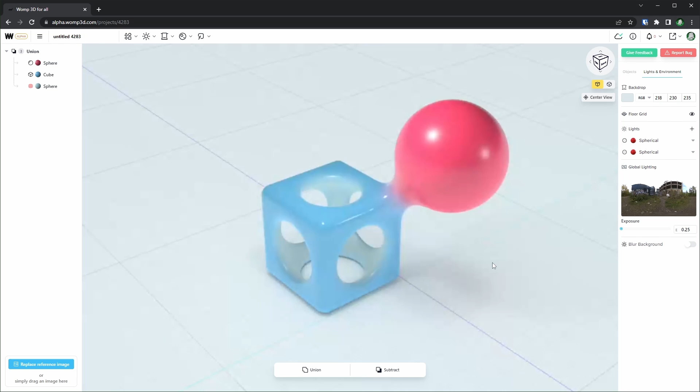First thing we should talk about is how to move around. You can left click and drag, and this is going to orbit the camera. You can also right click and drag, and this is going to pan back and forth. And you can use the scroll wheel to zoom in and out.

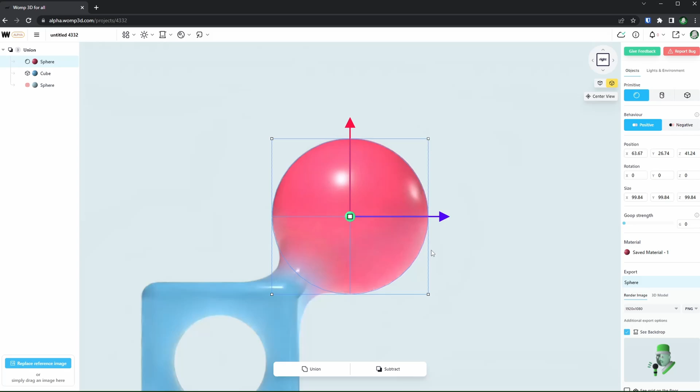We also have these options up here if you want to just snap to the front, things like that. And if you drift off to the side, you can select an object and hit center view, and that will put it in the center of the screen. We also have an option to switch between perspective and orthographic. So if you're in orthographic, you can look from the front without perspective, and it just looks straight on.

Now, as you saw, we can select objects. We can do that by just left clicking on them. And if you want to move them around, we have these options on the right over here: position, rotation, and size. You can just type in values that you want if you know what you want, or you can scroll through them. To do that, you just hover over the letter, click and drag. And if you want to undo, you can just hit Control-Z.

You can also move things around by selecting them, and then we have these arrows right here. You can click and drag on those to move them back and forth. Also, if you hover in the middle, we have these other options. That's basically moving things along 2 axes instead of 1.

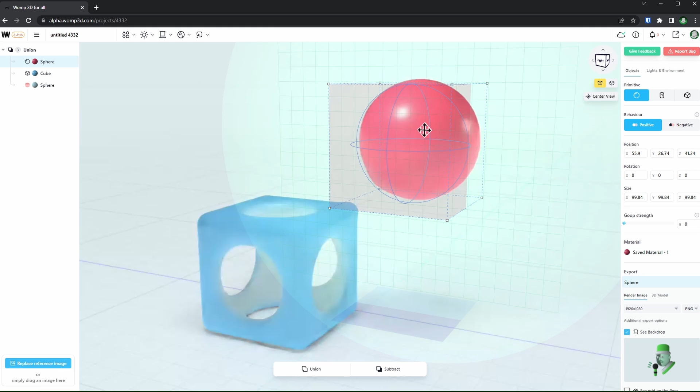If you want to rotate things, you just go to any corner and you can see we have arrows right here. So if you click and drag on those and you're outside of the circle, it will just display the amount of degrees. If you're on the inside of the circle, it will snap to these increments, which is pretty handy. Now let's select the cube for this part.

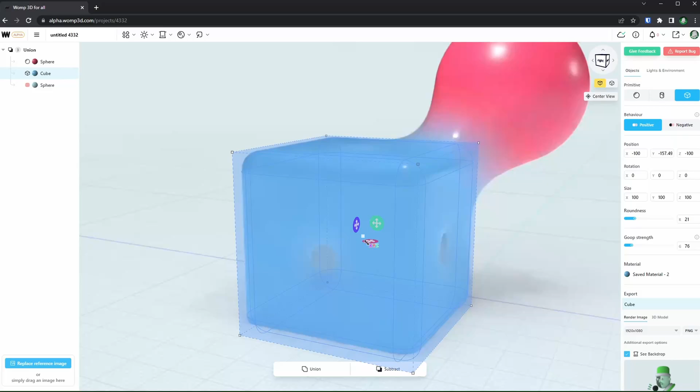You can scale things up and down by hovering over the white square in the middle and clicking and dragging, and that will scale the whole thing up and down. You can also hover over any of the edges, and you can see we have these icons right here. When you hover over those, it will let you select a face, and then if you click and drag, it will extend that face. So this is more useful for things like cubes and cylinders. If you do that with a sphere, it will scale uniformly.

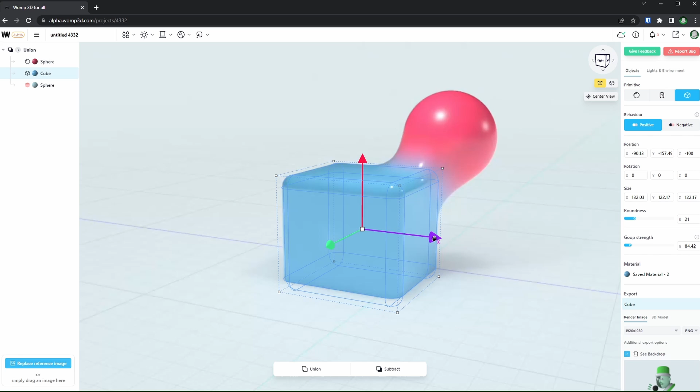Now, I'm sure you've noticed something weird going on with the cube right here, how there's an object cutting into it. That's because we actually have a third shape in here, and we can select it over on the left by just clicking on this one. Now that we have this selected, you can see more clearly that this is cutting into our cube. That's because this is a negative shape. So on the right over here, under behavior, we have 2 options, positive and negative. Negative is going to cut into other shapes as long as they are above it over here in the outliner. And we can turn this to positive, and now we can actually see that other sphere.

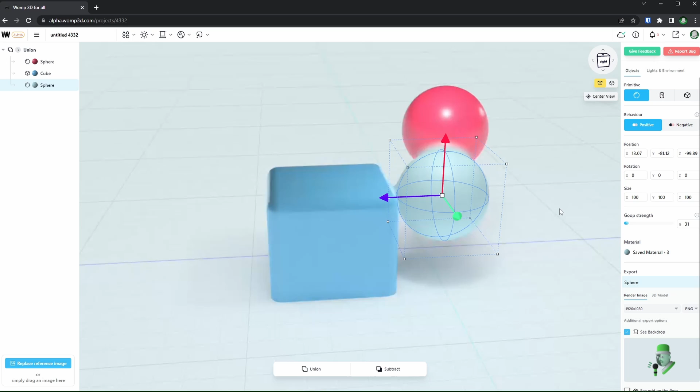If we drag it over here for a second, this is a good opportunity to explain Goop strength. So over on the right, we have Goop strength right here. And when we turn it up, you can see that these objects start kind of fusing together. Goop strength, when you turn it up, they'll be able to connect from further apart. So now it's not connected, but if I turn Goop strength up, it will eventually connect. And a nice thing about the way these connect too is it's going to blend the materials, which just looks pretty nice.

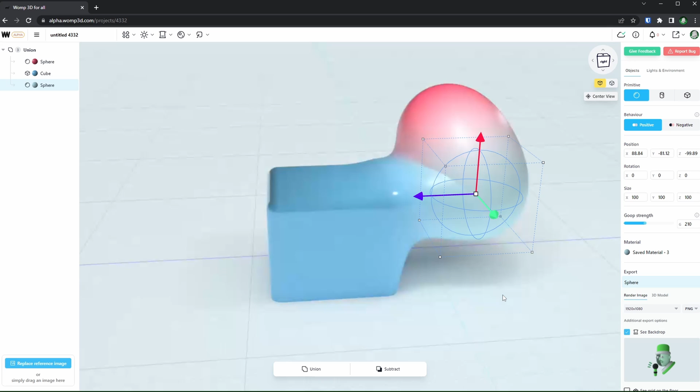Now let's check out the interface. So on the left over here, we have the list of our objects, and you can see when we hover over, we have some different options. Also, when you hover over it, if you look over here, you can see that it's outlining the object that you're hovering over, which is nice if you're trying to find objects. You can also click on them to select them. And then we have this button on the side. When you click that, we have these options in here for copy, paste, duplicate, things like that. You can also click and drag to move them around if you want to reorder them.

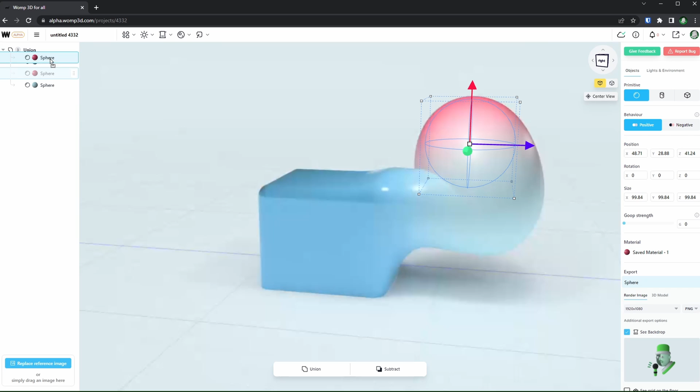Now up at the top, we have our scene name, so you can click on that to change it. I'm just going to change this to say Goobot for now, because that's what we're going to be making later.

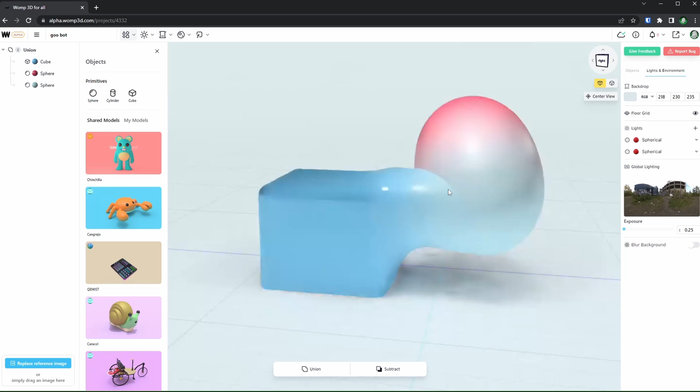Next to that, we have objects. This is where you can bring in new objects. All you have to do is click on them and it will put a new one in the center of the scene. You can delete them by having them selected and hitting backspace. Also, if you have an object selected in your scene and you go over here, you'll see these extra little icons, and if you click on that, it will swap it out with the object you select.

Down here, we also have a way to add in community projects, which is a pretty neat thing to see.

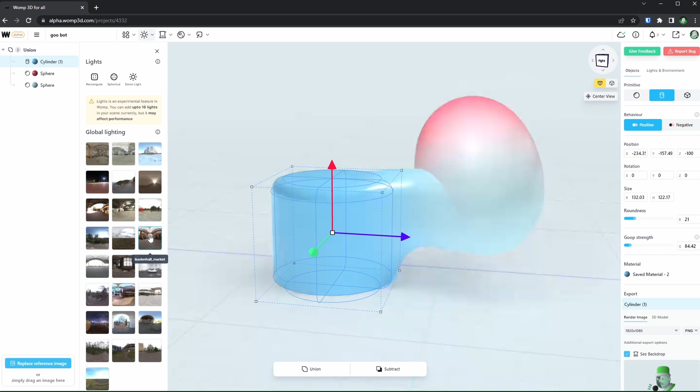Next, we have global scene lighting, so you can add in different lamps and things like that to light your scene, and below we have different images for global lighting. If you change this, it's going to change the overall lighting and also change the way the reflections look. Next, we have backdrop. This is just going to change the background color, and it will also change some of the reflected color in here.

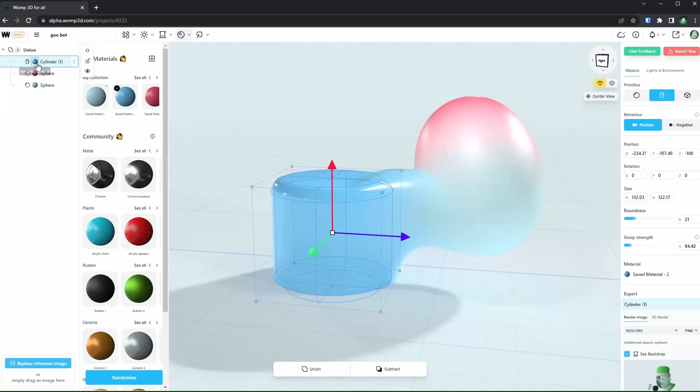Next, we have materials. This is where you can see all of the materials you've made, and again we have materials from the community if you want to use somebody else's. Another way of changing the materials is over in the outliner — you can just click on these little colored balls, and that's another way to open up this panel.

Last, we have functions where you can duplicate, union, and subtract. We'll talk more about union and subtract later.

Now that we've explained all that, let's come over here and delete this and get started with our robot. So to get started with the body, I want to add in a cylinder. We can click this button up here, add in a cylinder like that.

I'm going to change the backdrop so it's a little higher contrast. A way to change the backdrop is when you have nothing selected, you have lights and environment over here, and we can change to whatever color we want. I'm going to change this to a purple color and give it a little color like that.

I'm just going to drag this up and expand the radius a little, and this will be for the body of our robot. Now we can also copy and paste to duplicate objects.

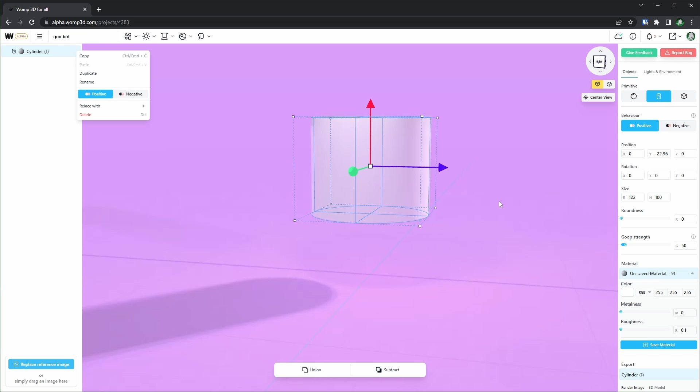If you come over here and click on this button right there, you can see we have copy, paste, duplicate, rename — we have some options here. We can actually just use Control C and Control V, and that will duplicate this.

Now I'm going to rotate this around, so let's rotate like this, and I'll keep it on the inside so we can snap it to 90 degrees like that. Now I'm going to turn the radius down like this and turn the height up, so this is going to be for our arms basically.

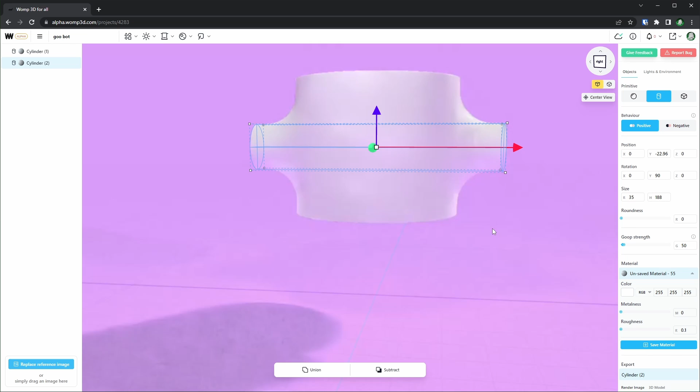And we can mess with the roundness and the goop strength. The roundness is going to affect the edges — you can see as I'm rounding it, they're kind of smoothing off. If you turn this up all the way, it will become kind of capsule shaped like that.

So I want to keep this pretty low, I'll just set it to something like 5. I like to have a slight rounded edge just so it catches the light a little better. I'll do that for this one also.

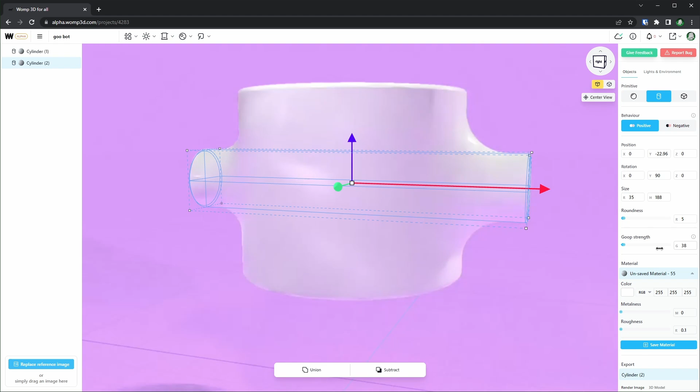And for goop strength, that is going to control how much it's curving right here. So we can just click and drag right here to make it slide. If we turn this down all the way, it will be completely sharp where they intersect right there. So I don't usually like to have it set at 0, especially for this shape — I kind of like when it's a little more smooth like that.

So let's change some of these colors a little. I'll just click on this. One way to start changing colors is down here on the right — we have material options right here. You can see it says unsaved material. So let's just change the color of this.

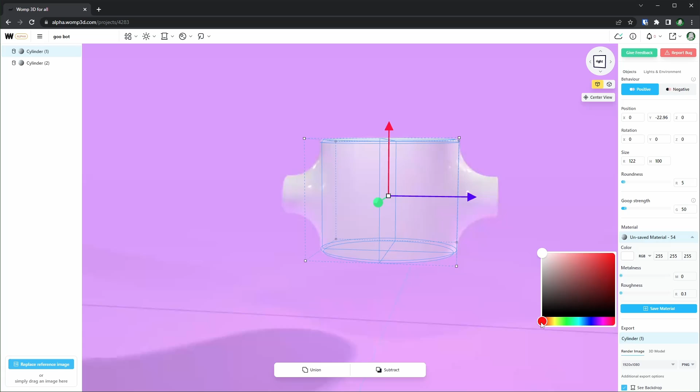I'm gonna make our robot mostly orange with maybe some purple details. So let's make this orange right here. This one's gonna be a lighter orange color. I think that is pretty good.

Now we can save this material with this save material button, and I'll just name it orange, something like that, and hit save. So now we can reuse this on our other objects. I'll click this object, go up to the material option, and we have recently used at the top, which we can use to have our list of materials.

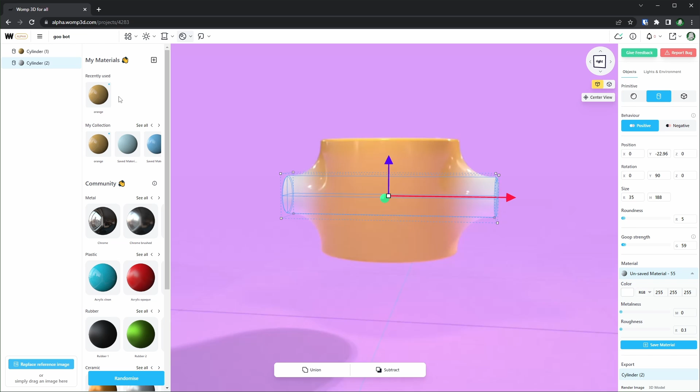I'll use this, but I actually want this to be a different color, so I'll hit duplicate and apply. Now we have a copy, and I'll just call this dark orange. Let's drag this down and we'll have something a little darker.

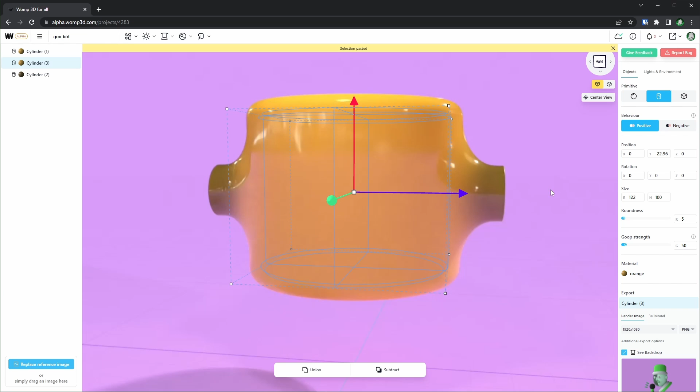Let's duplicate this right here, select it, Control C, Control V, like that. I'll change the radius down a little. We're just gonna create an extra little shape at the top and the bottom. I think maybe we should turn the goop strength down, so I'll turn it down to something like 5, so it's a little sharper.

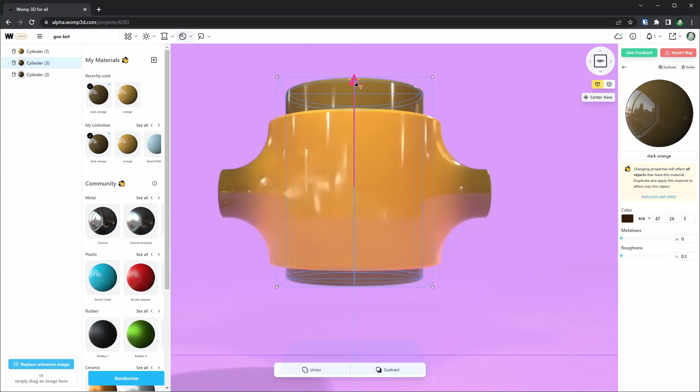I also want to change the material to be dark like that, so I'll pull it up a little. I want to kind of hollow this out so we can add a negative object, but I want it to be pretty close to the same size and shape.

So I'll copy paste this, Control C, Control V, and with that selected, turn the radius down, and make this a negative shape. If this doesn't work, it's because negative shapes have to be below other objects, so you just click and drag it down. You want to make sure the things they're cutting into are above them. That's the way they work.

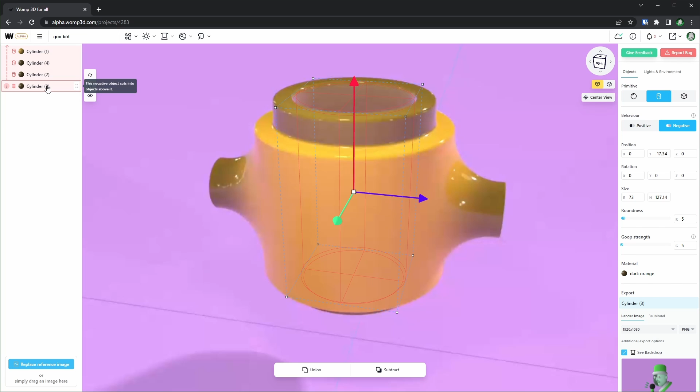It'll actually tell you that if you hover over it, it says negative, this negative object cuts into objects above it. And we can drag the bottom up a little too, so it's not going in too deep.

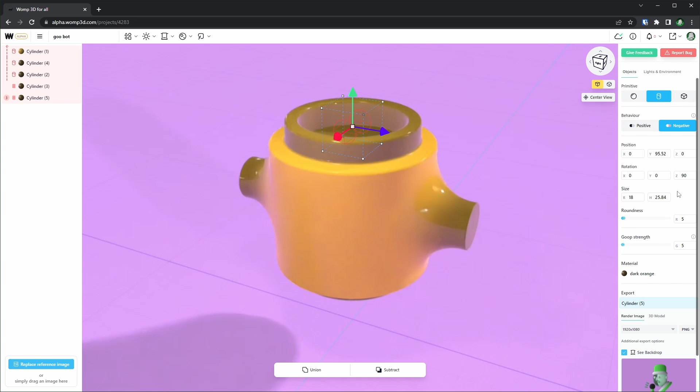Let's do some more fun stuff with negative shapes. I'll select this one we just used and duplicate it, Control C, Control V, and rotate this 90 degrees by typing it in. Now it's on its side. I'll turn the radius down and the height up so it's cutting through. I think this is a little too low, so I'll pull it up.

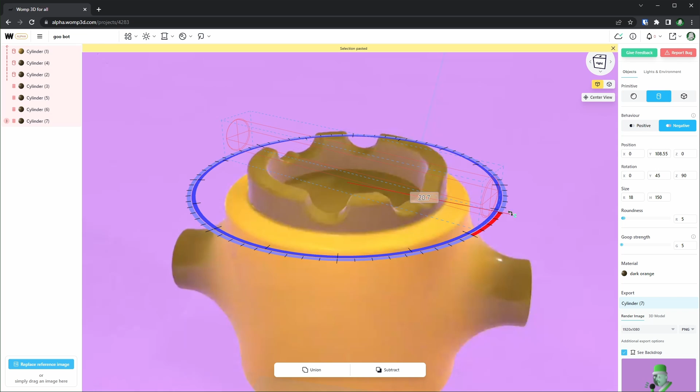I want there to be these cuts going all the way around, so I'm gonna duplicate this a few times with Control C, Control V, go to the corner, rotate this 45 degrees, and keep doing this a few times until we go all the way around. There we go, now we have this cool shape right here.

I want to make the top of this look kind of goopy like a lava lamp. To do that, I'm going to select this cylinder, duplicate it with Control C, Control V, and make this positive. Now I want this to be below everything so it's not being cut into, and I'm going to make this a different material.

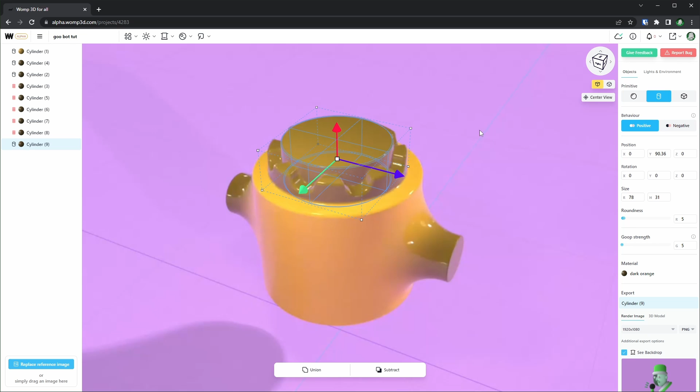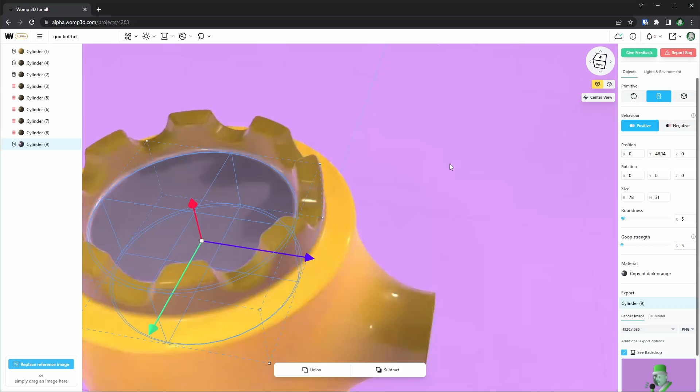Let's go down over here, duplicate and apply, and I'm going to turn the metalness up most of the way. I want this to be kind of like a pale purple, something like this maybe, and I'll drag it down a little. I don't want this to morph too much into the environment around it, and if we turn the goop strength up, you can see that's exactly what it's going to do.

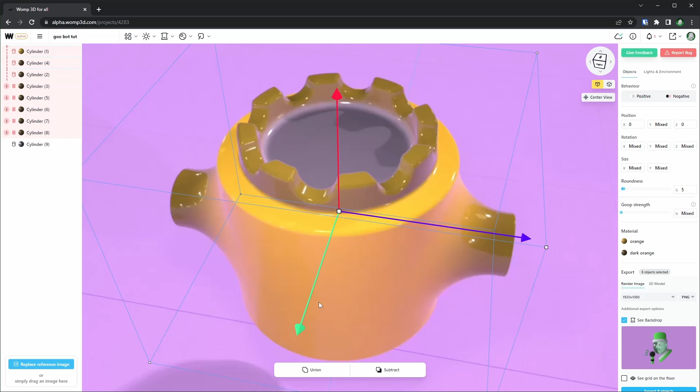So I guess now is a good time to talk more about unions. I like to use these kind of like groups. Right now we have the cylinder that we don't want connected, and then everything else, which is basically the body of our robot. Let's go to the outliner, select this bottom shape, then shift select the top one, which selects everything except our cylinder, and we can click union. As soon as we do that, you can see this disconnects over here.

It's not really connecting to it anymore, and we have everything kind of cleared up over here. It's just called Union 1, and we can look inside of it by clicking this arrow right there.

So union is a way of grouping a bunch of things together. If you know about Boolean stuff, this is going to make everything connected. But because all of this is already connected, we just have a tidy group.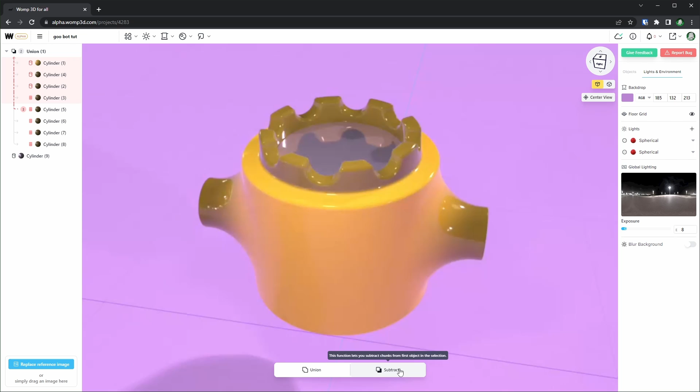So subtract is a similar thing, and they have a little description of what it does down here. It says this function lets you subtract chunks from the first object in the selection. So it would basically make this first cylinder be positive and then everything below it be negative.

Another thing we can do is hide entire unions with this eye right here. So we can click that, and now we're only looking at this cylinder.

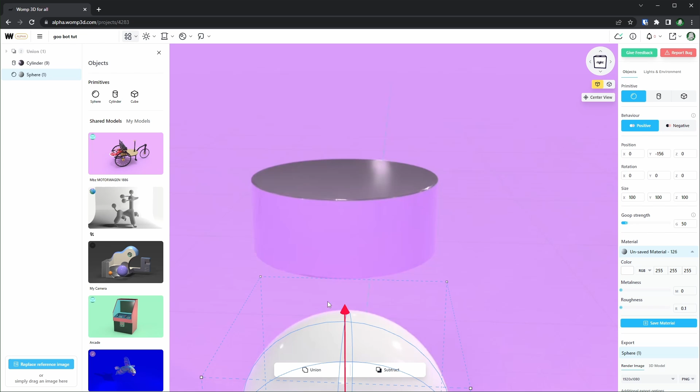So I am going to add in a sphere, and it ended up down here. Let's drag it up, and I'm going to scale it down like that. Let's move it around over here.

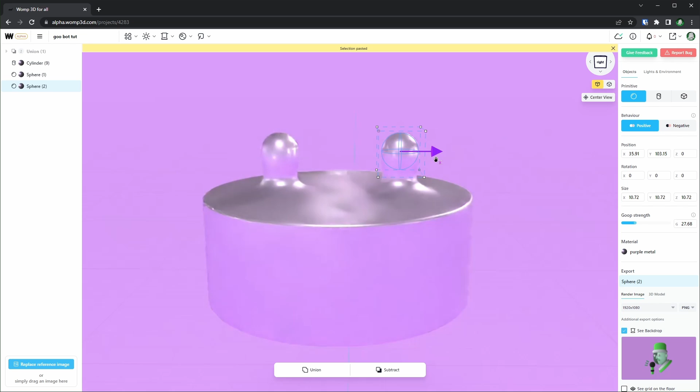And I'm going to change the material, so we can change it over here. Now we can duplicate this around a bunch of times to kind of get this looking a little more blobby, like a lava lamp. So Control C, Control V, move some of this around, change the scale and move it around and stuff. And I'll add one that's a little higher in the middle like that.

But I want this to look more connected, so you can either change the Goop strength, just turn it up until it starts connecting, but then it's going to connect to all that stuff. So what I'll do instead, just Control Z to go back.

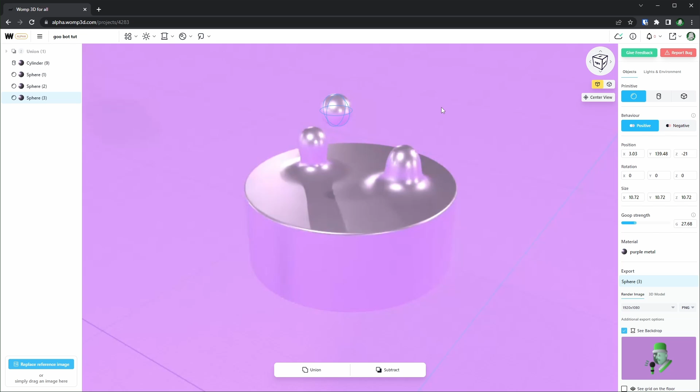So what I'll do instead is just duplicate this, Control C, Control V, and I'm going to turn this into a cylinder. So we can just hit the swap button right here. Now we have this cylinder.

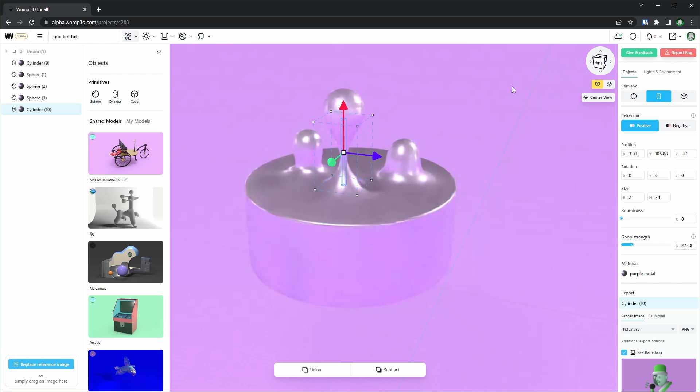I'm just going to drag this into the middle. I'm going to turn the radius down quite a bit like that so it's skinny, and then I'll turn the height up. And we can use this to connect the two objects like that. It's making this cool kind of bridging goopy thing.

And I think that looks awesome. So I'll just duplicate a few more of these around and maybe make them a little smaller. Play with the Goop strength if you want it to look a little different.

And if we want, we can change some of the colors of these too. So I'll select this one and maybe just duplicate this color, and I'll make this a little more vibrant like that. We can add that to other things, but I'd like a different color too.

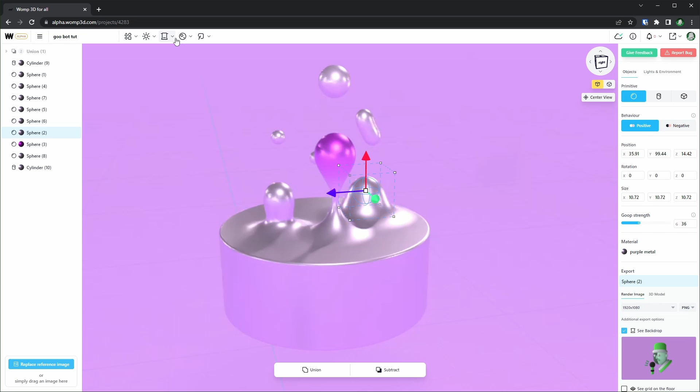So let's duplicate this again, and I'll make this more orange like that. So we have some nice contrast now. So we can just go over here, click on things and apply different materials that we have over here.

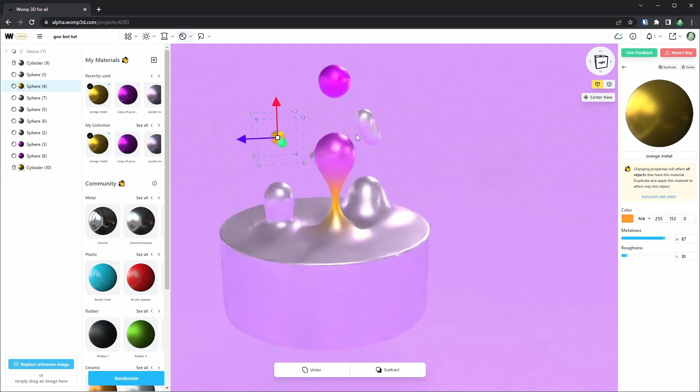So I'll make that one purple, this one we can make orange. We'll just go around and add these together. So I think that's good for now, but if you want, feel free to add more.

And now let's add all of these together too into a single union. So I'm just going to click on the first one, shift click on the last one, and then we'll add a union right here. And we can bring back this first one.

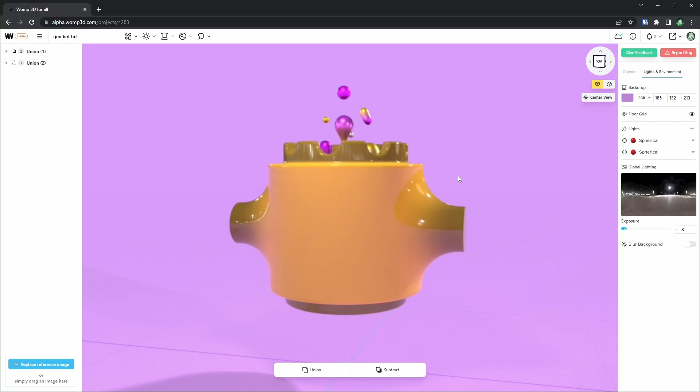All right, let's make the face now. So the face, I'm just gonna start off with a sphere. You can add in a sphere right here. I'll drag it out a little and pull it up until it's like close to the center.

And I want to add the light purple metal material. So let's go over here. We have purple metal. Let's look from the front. And I'll just select this and scale it down.

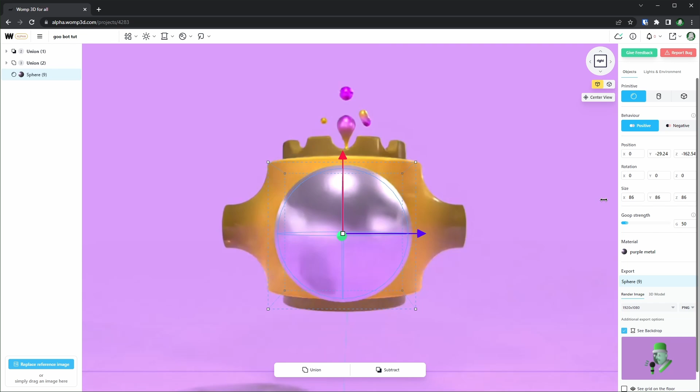Now I'm going to hit Control C, Control V, and we're just going to copy this. And this is going to be for our eye. So I want to make this a little darker.

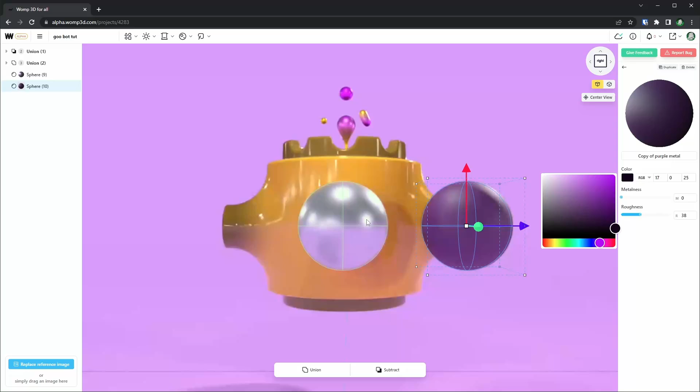We can come over here and let's just duplicate this. I'm going to turn the metalness all the way down and the roughness up a little more, so it's a little more matte, less reflective, and I want this to be quite a bit darker, just so we have something a little higher contrast. Now let's maybe turn the goop level down.

I'll set this one to 5, and I'll set this one to 5 also for now. Now let's line this up for where we want one of our eyes to be. Turn the size down. If you want this to be sharper, turn the goop strength down like that. So let's talk about mirroring now, because I want to mirror this eye.

Right now mirroring is in development, so at the time of recording there are no options for it. There's just a keyboard shortcut, Control, Shift, and M. Now you can see it's mirrored to the other side, which is going to help us out a lot. By the time this comes out, this feature might exist in the menu, but for now we just have to use this keyboard shortcut.

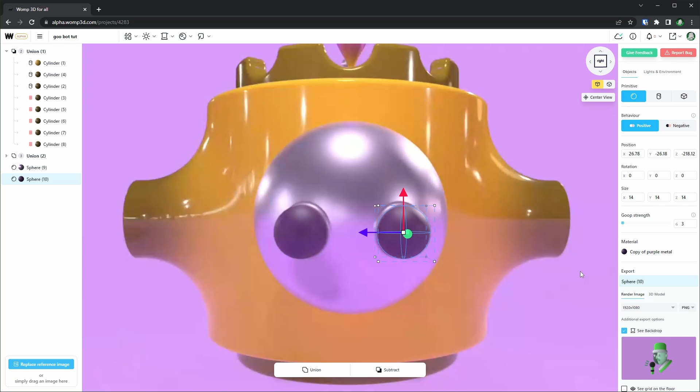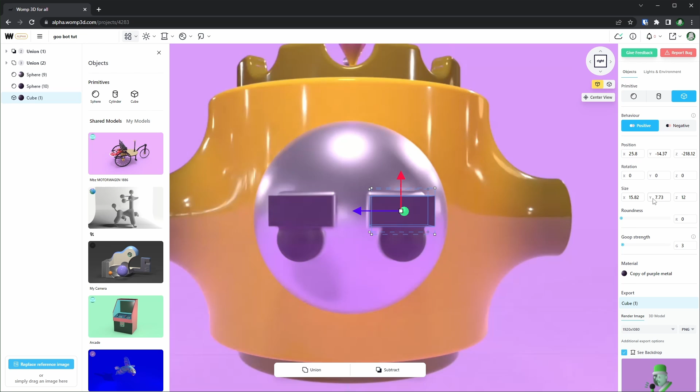Now I'm going to duplicate this, Control C, Control V. You can see this will also duplicate that mirroring effect, which is cool. Now I want to swap this out for a cube, so click on this little swap button right there, and I'll make these kind of angry eyebrows. Grab these, move them where you want. You can also change the size over here, so the X like that. I'll rotate this a little so it's conforming to the head better, and rotate it down like that.

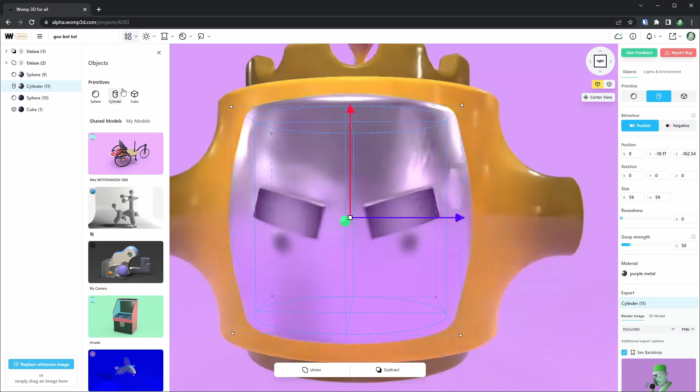Now for the mouth, I'm going to use a cylinder, so I'm just going to duplicate this, Control C, Control V, and we're going to go up here and swap it with a cylinder. Now I am just going to drag it from the top to make it quite a bit thinner. And we also want to change the material to that dark color right here.

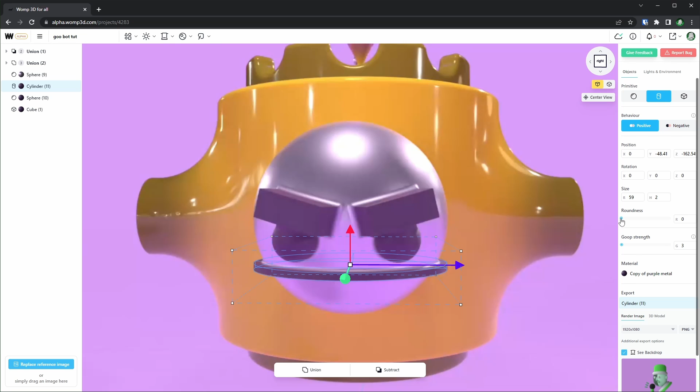Now I want the goop strength down pretty low, I'll set that to like 3. There we go, now this is what we have. I think the height needs to be turned up a little, and I want the roundness turned up all the way so that it's completely round. I think it would be nice to be a little smaller, so it won't stick out at the edges, so we'll just change the radius down a little bit until it's as far as we want.

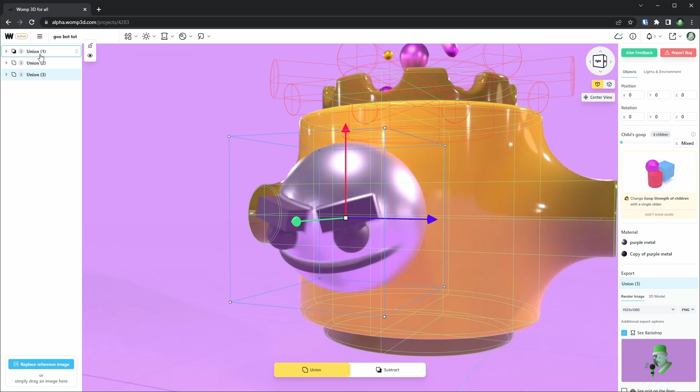Now we're going to give this guy kind of an evil smile. Again, let's put all these into a union, so I'm just going to select all of them, go to union right there, and we can start renaming these. So we have the body, double click to name it. This is called Goop. And I'll name this one head, like that.

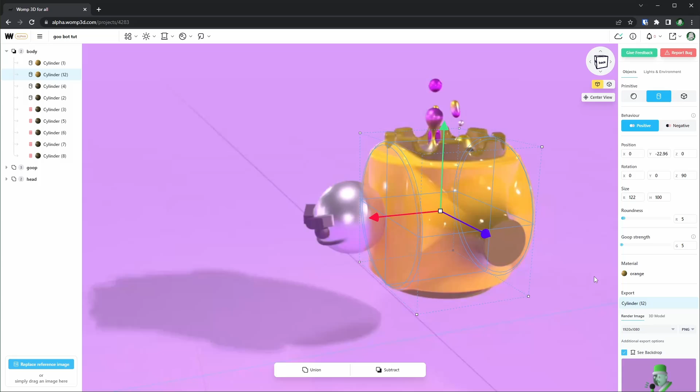So I do want to add a few things to the body now. I want a little cylinder that's kind of jutting out of the front. Let's come in here, duplicate this first cylinder with Control C, Control V. I'm going to rotate it around 90 degrees, like that, and turn the radius down, pull it to the front as far as we think it should go. So I think the head maybe should be inside of it a little. Let's change the color of this to be darker.

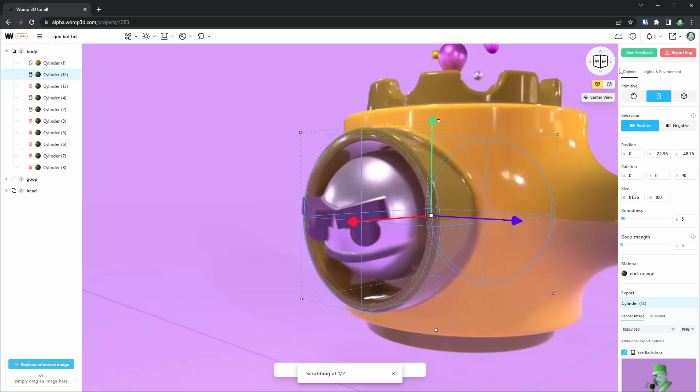And I'll copy and paste that and make it negative, so we're cutting it out of that shape. I'm basically just going to play with the radius until I think these look like good sizes. Another cool thing about unions is when you have them all selected, you can scale them up and down at the same time. So if you want to make the head a little bigger or smaller, you can do that by selecting the whole union.

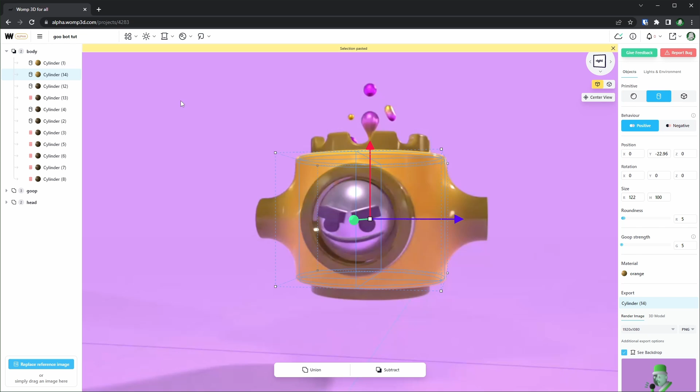So next, let's work on the legs. First, I want to bring in a sphere, so I'll duplicate this, Control C, Control V, and we'll swap it out over here. Click this little button, so we have an orange sphere now. Just drag it down, and I'll change the size over here until it's a little smaller. And I don't want this to be part of the body, so I'm going to drag this all the way to the bottom right there, and I'll just collapse this.

So I think we might need to lift everything up, so I'm just going to shift, select everything, and lift it up so we have some room for the legs. And to start the legs, I'm just going to use a cylinder, so let's just duplicate this like that.

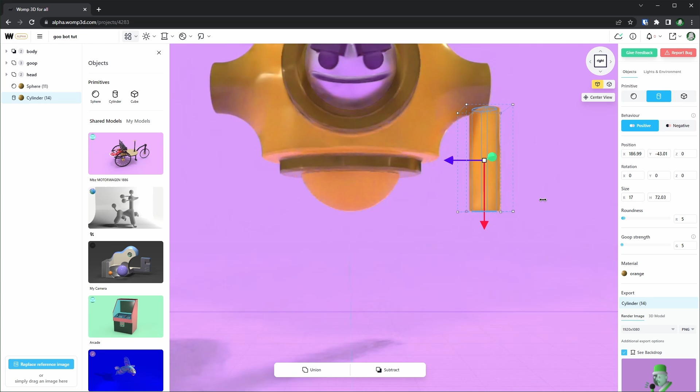And I'll move it to the side, and we'll swap it out with a cylinder right here. I just want to change the radius to make it a little skinnier, and we can make it shorter too. So I think this looks pretty good, but I want to change the color of this.

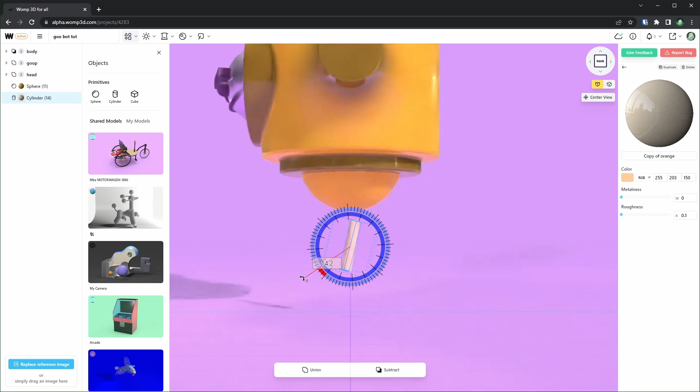I'll come over here, we'll duplicate it, and I want it to be orange, but a little lighter and more pale. So just drag it over here a little. I'm just going to look from the side like this, and I'll rotate it a little, copy, paste, and then we'll rotate another one like this, and just drag it down like that.

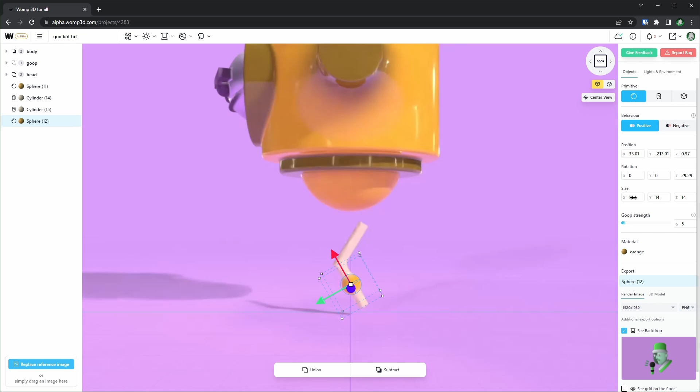Again, let's duplicate this, and we'll swap it out with a sphere like that. Now let's change this to be our regular orange color, which is this one right here. And I want it to be a little bigger, so scale it up and just put it where the knee is.

So I don't want these to be fusing into each other, so I'm just going to turn the Goop strength all the way down for this one, so it kind of just looks like it's holding these two sticks together. And if you want these to be shorter or longer, you can just grab the bottom and pull it in like that.

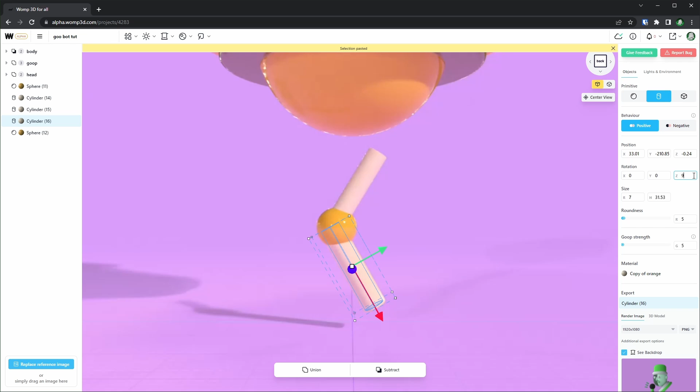So again, I will duplicate this bottom one, Control C, Control V, and I want this to be rotated a full 90 degrees, so I'll just type in 90, and I'll turn the Goop strength all the way down for this one, and I want to turn the roundness all the way up so it's kind of capsule shaped.

Now this is going to be the foot, so I'll just put it a little lower where I want the foot to be, and we'll turn the radius up, and I want it to be a little longer. There we go. I want this to be orange also, so let's change it over here like that.

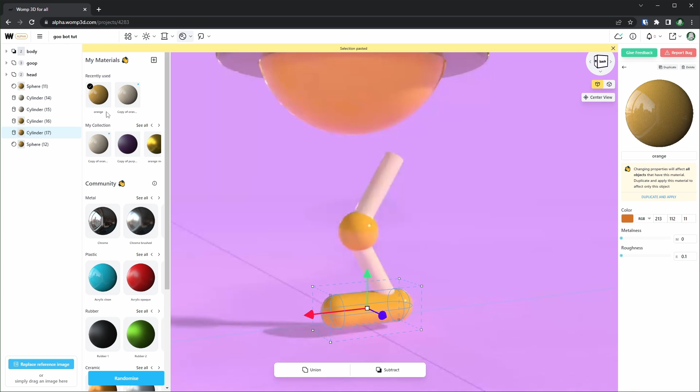And I want the bottom of the foot to be flat, so we can just duplicate this, Control C, Control V, and I will swap this out over here with a cube. So we can turn the roundness down, and I'll make this negative. And I just want to bring this down so we can make the bottom of the foot flat like that. Let's mirror everything in here.

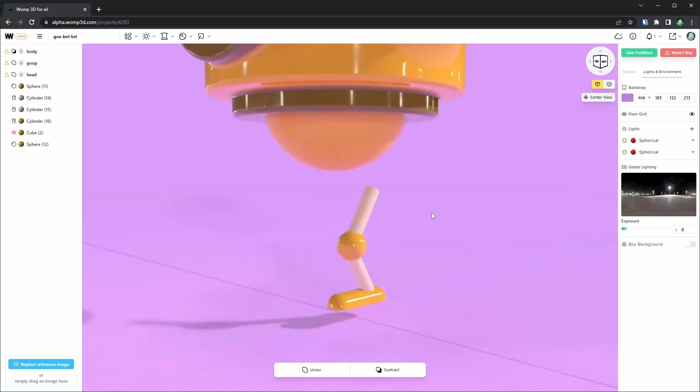So again, to mirror, you just want to select your object and hit Control-Shift-M like that, and it will mirror to the other side. So we have to do this to each of our objects, and also we want to do this before we turn it into a union. Select this, Control-Shift-M, and for the last two objects. So we have everything mirrored.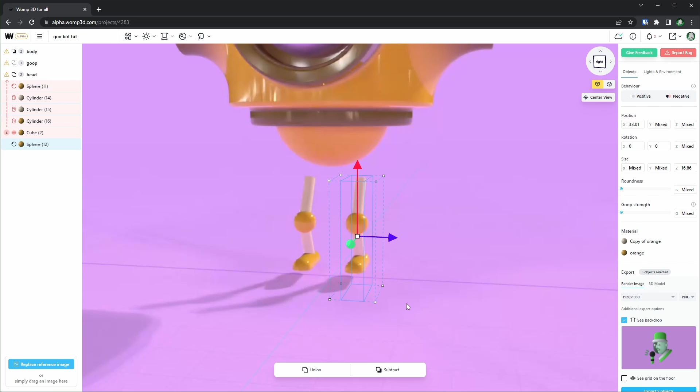Now let's select all of this in here, and I just want to rotate it to the side a little so it's not straightforward. So we'll just take this, rotate it a little. Don't worry about being too precise. Select the legs and move them up like that. And we can look from the side to make sure that this actually looks good. Maybe I'll pull it forward a little like that.

So let's select all of these loose parts in here that we are using for our legs. Left click and shift to select all of those and turn that into a union like that. And we can rename this legs.

All right, so let's make a little platform for this guy to stand on now. So I'll just add in a cube like that, and I'll drag the top down like this, and we'll just try to line it up with the bottom of the feet.

And another thing is, if you want the feet to be a little more rounded on the edge, you can just select the cube that we're using to cut into the foot, and you can turn the Goop strength up a little like that, and you can see as I'm doing that, it's kind of rounding the bottom off.

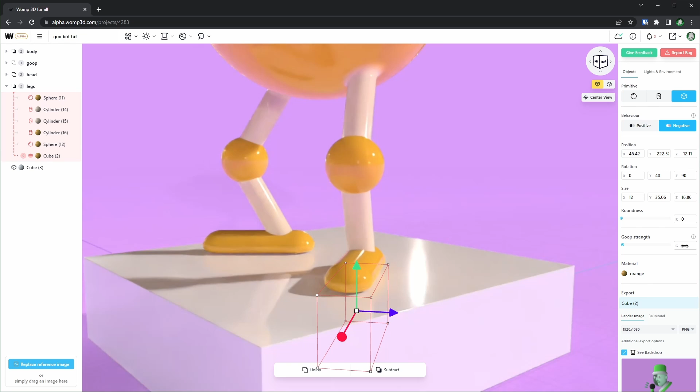Scale this whole thing up a little bigger. I'll just type in 150 like that, and I want it to be rounder. And I want this to be a different color, so let's select it and check out the materials we have already going on. Let's try this purple one right here. I'm going to duplicate this, Control C, Control V, go back over here and maybe make this quite a bit bigger, 250 and 250, and then we can drag it down.

I'm gonna select everything and just drag it up. So next I'm gonna make the arms, and these I want to look kind of like bendy pipes. So we're gonna do something a little more complex for this one.

We're gonna add in a cylinder right here, and we'll pull it to the side. Now I wanna rotate this 90 degrees, so I'll just type in 90 on the Z like that. And if you haven't noticed, the axes are a little different than in Blender, so the Z and the Y will be swapped.

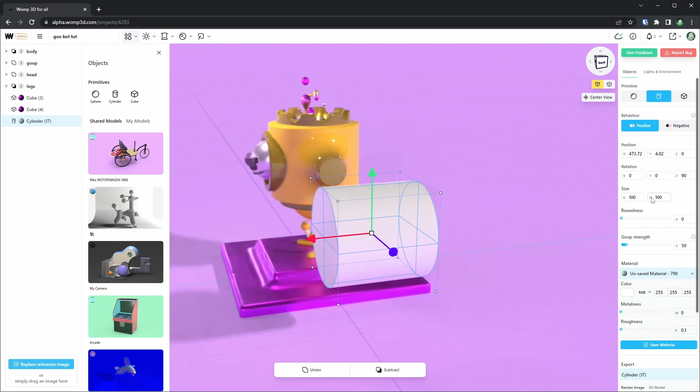This is what we're going to use for the outside of the tube. Let's turn the height down a little like that. Now I'm going to copy and paste this, Control C, Control V, and I'll make it negative. And I just need to turn the radius down a little bit like that. So you can see now that it's cutting into it, okay? So this is how you can determine how thick it's gonna be.

I want to make this more like a round tube, so we can select the outside one and turn the roundness all the way up like that. And if we turn the goop strength all the way down, you can see that the inside is pretty sharp, but as we turn the goop strength up, you can see it will just kind of turn into this donut shape. So you can really dial in how big you want it.

I just want to make this quite a bit smaller, and you can just keep turning the goop strength up like that. Now I want to cut this so that we only have this top corner in here.

First, let's actually make all of these different colors. So a shortcut is you can come over here to the outliner and click on these little colored balls over here. You can click on it and just add in whatever you want. I'll use this one, it's kind of like our lighter orange color. And we can set that for the negative and for the positive shape.

Okay, so now I'll select the outside one and I'll copy and paste it, so we have a second one in there. And I'll replace it with a cube. So I'll turn the roundness all the way down and we'll bring it up right here. So this is being cut into right now.

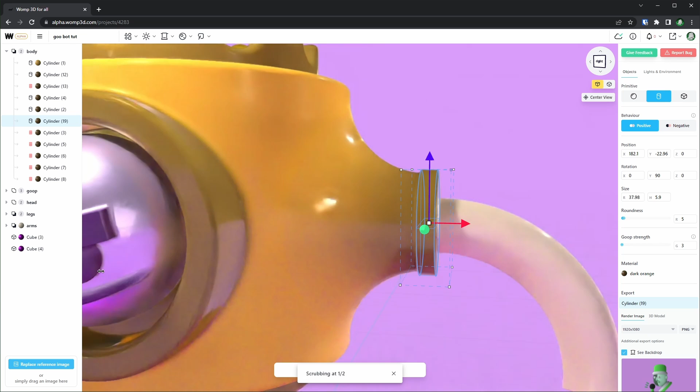And I think another thing that I'd like to do is select this one right here, that's part of our body. I'm gonna duplicate that, Control-C, Control-V. And I want to drag it to the side right here to kind of create like a cuff, something like that. I'll turn the goop strength down quite a bit so it's a little sharper, 3 or something like that. And I'll just turn the radius up. Yeah, I think that looks pretty good.

Let's just mirror it to the other side, so select it, Control-Shift-M. All right, for the hands, I want like a half sphere.

So we'll just bring a sphere in here, drag it over to the side like this, Control-C, Control-V like that, and we'll swap it with a cube and make it negative, and then drag this up so that we're revealing the other half like that. And we can mess with the goop strength to make it a little sharper. I'll maybe set this to like 5 or something like that.

Now I just want to mirror both of these, so again Control-Shift-M, make sure that we're actually selecting both like that. So with both of them selected, you can just scale it from the middle like that.

And both of these I want to make a different color. I want these to be more orange, dark orange. It's basically just like a very saturated brown at this point. Again, let's do that for the positive and negative shape.

And I want to add some claws, so we'll do a similar thing we did with the legs over here. I'll just duplicate this because it's already in the right spot and I want it to be mirrored also. Control-C, Control-V, and we'll turn this into a cylinder. I'll bring it down over here. I want to change the color too, so we can change it over here to just orange like that.

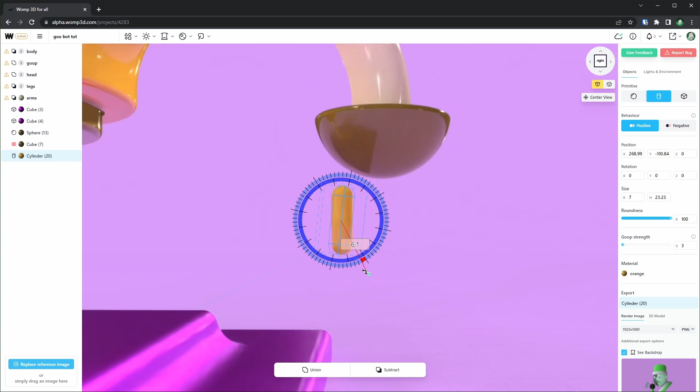Let's make it a little skinnier. And I'll turn the goop strength down. I want this to look more like a capsule, so I'll turn this up. I'm pretty much doing the same thing that I did for the legs. So, make this a little smaller, rotate it, Control-C, Control-V.

We can just spin this around like that and put it at the end. Or you can shift select both of them and rotate them both at the same time like that. So I'm just going to select both of them and move them into place now.

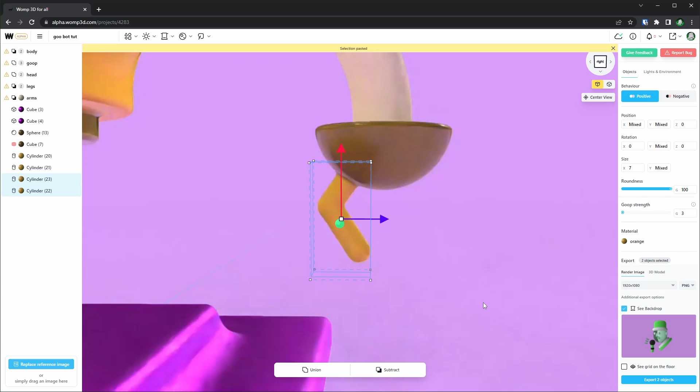And we can Control-C, Control-V with both of them selected, and I'll just spin this around. I'll rotate it 180 degrees and slide it to the other side.

All right, and I think that's pretty much it for our character. If we want, we can put some of these into a union. So I'll just select all of the hand parts and hit union and name that hands.

So for lights, if you have nothing selected, you can just click on the back. We have this lights and environment section. Again, you can change the backdrop if you like. You can change the exposure of the global lighting. And then you can see right here, we have some lights too.

So if you click on them, you'll be able to adjust them, adjust where they are. I think the default lighting is pretty good, but if you want, you can change the color of the light to whatever you want. And you can also change the brightness, like if you wanted it to be very red or something like that. But I'm just going to hit Control-Z to bring these back to the default settings.

So if you want to render this out as an image, you can do that. There's this button up in the top right, like a square with an arrow. You click on that and you can see we have this render image option. So if you wanted, you could click this so that the background is completely transparent, which is nice.

So if you want to make sure things are centered, usually what I do is just click an object that's in the center and hit center view. And then I'll just move this up and down like that. Basically, when you hit render, it's going to render out what you're seeing over here. So you don't really need to set up a camera, you just look at it from the angle you want it to render at.